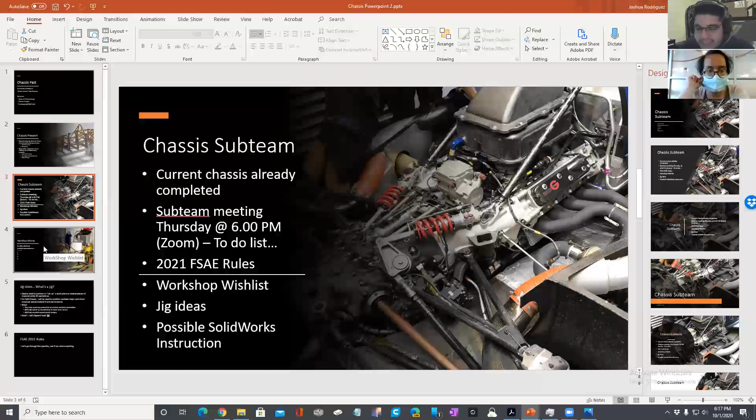Okay, so this was supposed to be the fun part. I was trying to make today fun.

Nobody else is in here, right? It's just me and you, I think. There's no one in the waiting room. I don't think there's a waiting room. Let me get out of this and make sure there's not a waiting room, because that'd be really awkward. But no, I specifically set this one up to not have a waiting room, because I noticed you messaged me last time, which I did see, but by the time I saw it, it had been like a day, so I wasn't going to message back. So going forward, I'm not going to have any waiting rooms, so everyone can just pop in. It's not really noticeable to me when there's someone waiting. So yeah, no one else is there, so I guess you'll be the first one.

What did you actually want to do in the shop? I think you specifically said welding, but is there anything else you want to get your hands on? Any type of experience you want with metalworking? I feel like I'm lacking the knowledge to know what I want, but as of now I just want the experience. I think it's just a little more research to see what I can actually get my hands on.

Okay, I'm writing this down so I remember, because I keep these PowerPoints.

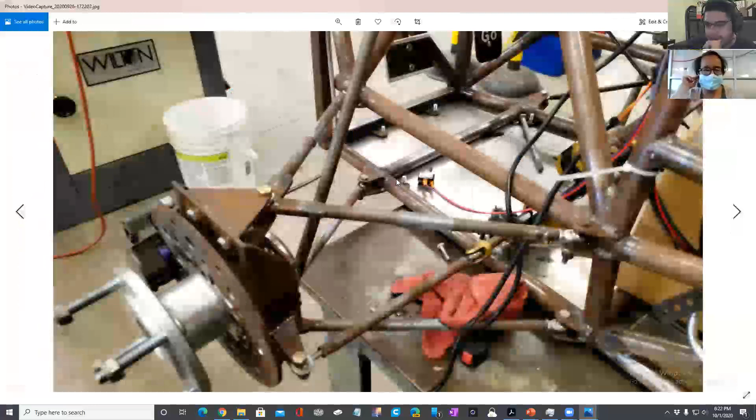Does that make sense? Yeah. Sorry, is that overwhelming a little bit? A little. Okay, so this piece right here, let me go back a little bit.

So we started with this piece coming off of the front roll hoop. This front part was just hanging in midair by itself, because it's not directly in line with this piece, and it's also not directly straight out from this. It's at an angle, and it's not directly parallel with the ground. It's actually upwards a bit. So in X, Y, and Z, it is actually off axis.

So I had to find that point in 3D space and then hold it there while somebody welded this. And then this is just hanging out like a twig from a tree. And then we would measure it again, because welding will actually impart a little bit of stress on this, and if there's nothing holding it in place, it will actually tend to lean one way or the other.

So we would weld it, and let's say we would weld on this side, it would actually pull it in a bit. But then we need to weld the other side too eventually, so we kind of do this. But you can't put too many welds in it, because then it becomes stuck in place, and you don't want that if you ended up pulling it off of where it needs to be.

So especially for pieces like this, I'd like to get something that we can use to more precisely locate it, because I did spend about 30 to 40 minutes on one side and then 10 to 20 minutes on the other, positioning it. They welded it a little bit, and we readjusted it with a hammer, a gentle hammer, but with a hammer.

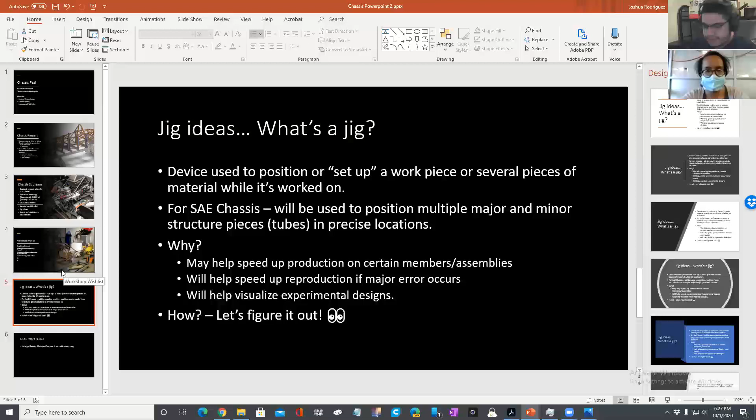Is that something you might have time to research in the next week or so? I think so. Okay, and it doesn't have to be official academic research where you have to cite your works or use official published papers by doctorals. It's like, no, we just Google and see what happens. Some of the best ideas come from strange websites on the internet you've never heard of before, like this guy building one in his garage. It's so cool.

Okay, so let's open up the rules. I think you had yours opened already, right? Yes. Okay, let me see. Where did mine go? There it is. Okay, I'm just curious.

What are you viewing the PDF on? What program? On Google Chrome. Oh okay, so you don't have a list of bookmarks on the side for it, right? No, there is bookmarks. Oh there is, it shows those. Yeah, there's general regulations, administrative regulations, and all that other stuff. I need to rework my Google and figure out why it doesn't show on mine.

Okay, so go to F, chassis and structural. I have no idea why it's F. No idea. And we went through this stuff already. Oh, I hate that scrolling mode. There we go. Do you want me to re-explain some of this stuff?

Yes, please. Okay, so the hoops kind of define the outer bounds of most of the vehicle, especially for the cockpit and the engine compartment. So the front roll hoop to the rear - you're kind of imagining there's a broomstick that goes right here, just because that's a long, flat piece that people will use to measure it. Primarily, you don't want the driver's head sticking above here because in the event of a rollover, this part may flatten out depending on your structure, and the only thing protecting the driver is the orientation of this hoop and the ground. So if his head sticks out above here, he's going to have a bad time in a rollover.

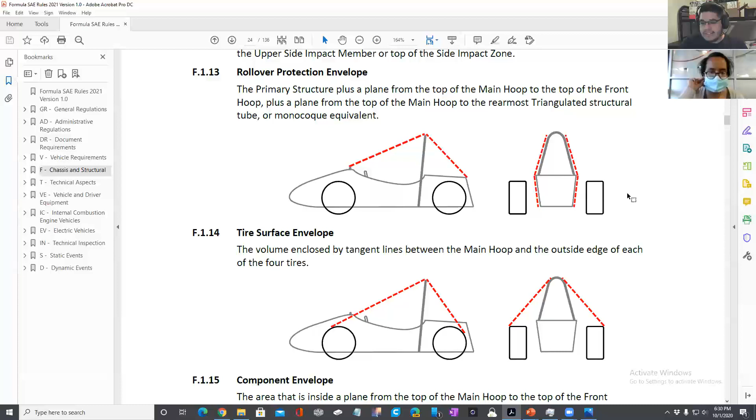And you have pretty much the same for this too - the roll hoop is shaped this way, don't go outside of this boundary. Same for this, although this isn't usually a problem for people because they tend to have body work and/or some kind of flooring for their vehicle, so you don't magically stick your foot outside of the car anyway. Does that make sense? Mm-hmm.

Okay, so that's for the chassis components. There's also one with the tires, which doesn't give us a lot of detail on that - it just says this is a volume described by the tires. That might be more for aerodynamic components, but we'll have to take a look at this later. It's not giving me a lot of information right here. This is something else, it's more of another redefinition.

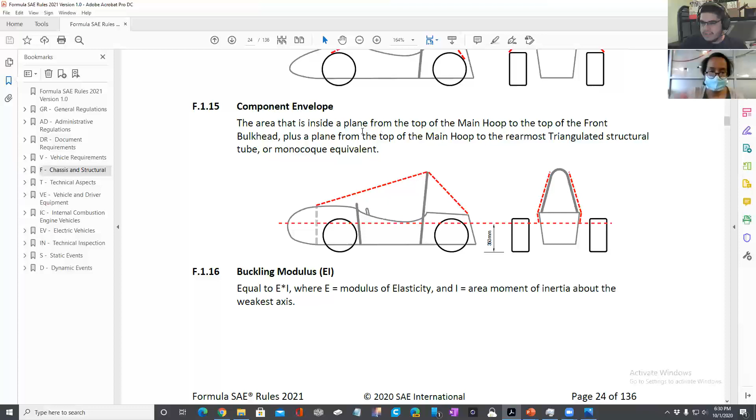Component envelope, interesting. You'll learn about this even more in your solids class. Basically, this is a calculation that has to do with the area, the cross-sectional area of a tubing, versus that area's average placement to the center of the axis. So it's a relationship between surface area and how close it is to the metal.

And then this is basically the stiffness of a metal, because everything in the universe, if you put force on it, it actually does elongate. Doesn't matter what the material is, it will elongate. This E, modulus of elasticity, determines how much it elongates, right?

A higher E means it's stiffer. I know it's called modulus of elasticity, but more elasticity doesn't actually mean it's more rubbery. It just means it's stiffer. So the naming gets kind of wacky. But even this pencil is technically elongating as I'm pulling on it. Even the diamond will, but obviously by a very minuscule amount because of its stiffness.

Whereas this, if I put force on it, it is bending because it has a much lower modulus of elasticity.

Most of this is taken care of by just choosing our go-to metal - it's not stainless steel, it's not aluminum. What do you call it? It's a variant of carbon steel. I forget the exact number, but our options are in here. There are other options as well, but that's what we stick to because it's cheap and easy to manufacture and work with.

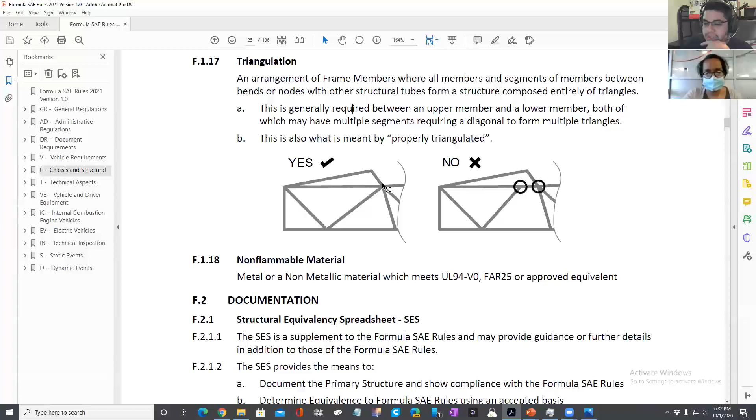Again, we're going to triangulate points if we ever build a chassis. So not this, more like this. This is called a node, where it all meets. And it just helps to distribute the force to other members, so you don't have too much force in one point with no way to counteract that, and then this tube will bend, which obviously is bad.

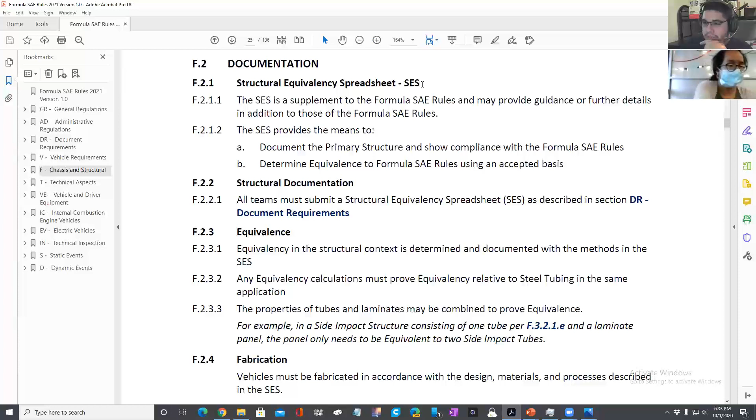This is kind of a beast. Kyle has this, I need to take a further look at it. But there's a few documents for chassis that we have to list out, like every beam that we have, and kind of the orientation and the weight. We'll go over that when we get to it because it's very boring.

Are you scrolling on yours or are you just watching me scroll? I'm scrolling too, but mostly just watching you. Okay, that's fine. I just realized I have it on screen - duh, like I didn't have to make you open it, but it's helpful that you know where it is too on your document.

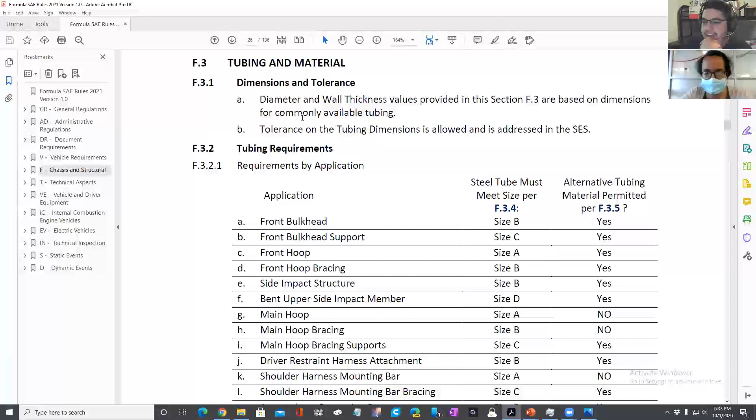Again, different designated structures have different tubing sizes. Most of them are ABC. This one's a weird size, but we don't have a bent upper side impact member, so we don't have to worry about that.

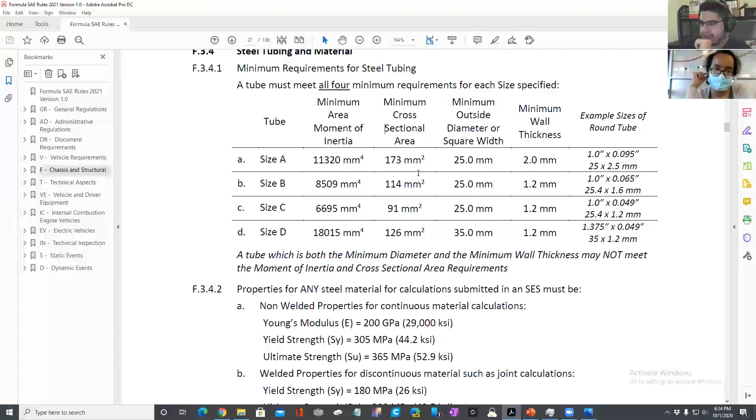So again, remember that I component we're talking about, E times I? This is the I right here, or heavily related to the I. Yeah, it's just different units and classifications. But they let you cheat - look, they just give it to you right here, like 'oh hey, you just use 1-inch tubing at this approximate size and you'll satisfy this requirement.' So it's nice that we have already pre-existing industrial sizes for the tubing that we need. Makes it a whole lot easier to construct.

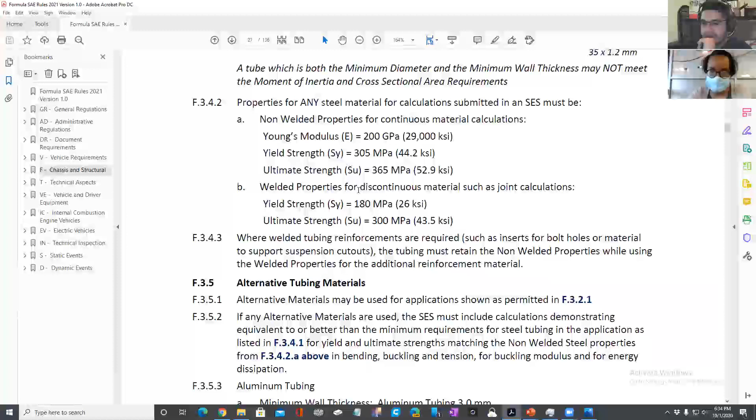Now there's standards for the metal. It needs to conform to the stiffness. And these are other things that have to do with that, but you're primarily looking at this right here - welded properties for discontinuous materials such as joint calculations. I don't think we have any discontinuous joints, although I'll need to look up the definition of that.

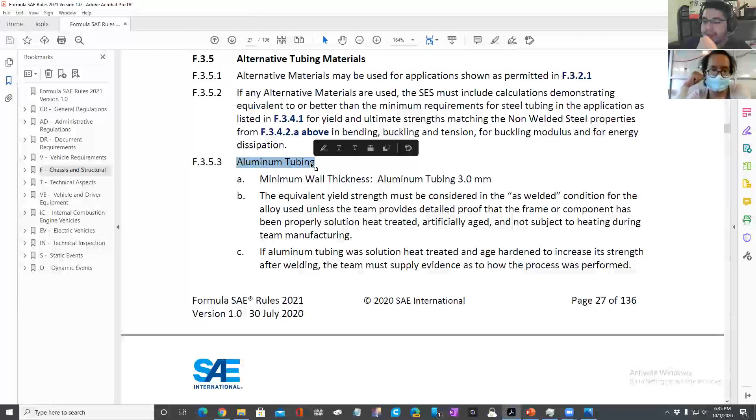Alternative materials - yeah, so again, aluminum is lighter. You do tend to need more volume of it, but you can have a stiffer aluminum structure with less overall mass. It is more difficult to weld though, so people typically don't do it. It's also more expensive.

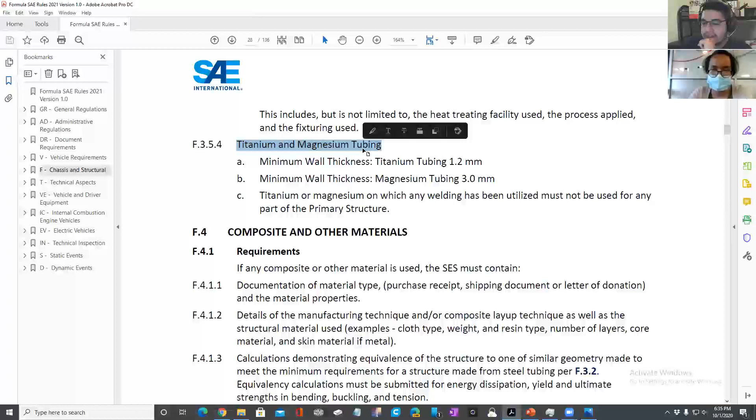Kind of the same thing with magnesium and titanium, but to a bigger extent, way more expensive. Obviously a better material in terms of stiffness and weight, but working with it and buying it is very difficult.

Steven wanted me to look into carbon fiber monocoques, but I want to get the chassis jig done before I look into building any kind of carbon fiber chassis at all, because it's not the same procedure. It's not like you're taking a bunch of tubes still - it's like you're building an actual 3D, a singular 3D object, like a beautifully sculpted piece of Play-Doh. It's one continuous piece, right? And then it has attachments for other points. So not like a steel tube chassis at all.

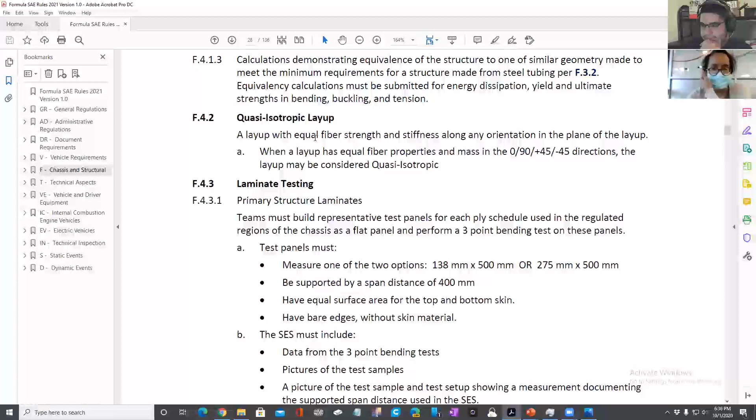If you see anything here that you're curious about, just let me know. If it seems really weird to you, it's probably weird to me as well.

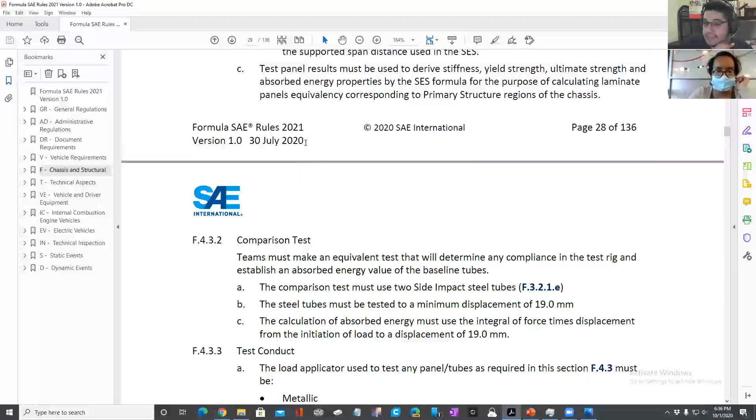Yeah, I just haven't taken the time to look at the rule book, but I'll do it this weekend. And then I think the officers might be going to the shop again Saturday. I'm not sure if we're going to make it a weekly thing, but it seems like we've been going on Saturdays. So if there's anything you wanted me to take a picture of, find out, or just show you, let me know.

Did I ever show any of you guys pictures of how big the space is? No, I don't think I did. Okay, I'll have to look that up on my phone because I do have pictures of it. It'd be nice if I had a floor plan too.

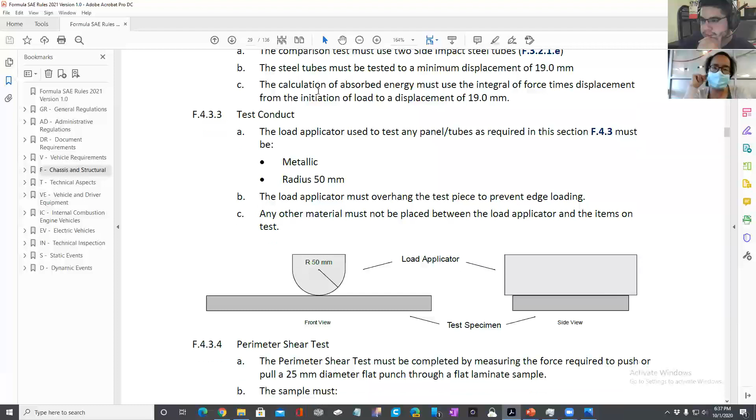So what building were you guys in before? We're in the same building still. We were in the PDSL, or Powertrain Dynamics and Systems Lab. Basically it's a building with two big rooms, front and back, separated by two doors. We had half of one side of the building, so a quarter of the overall space. Actually a little less than that because there was a hallway running down the middle, with a bunch of cabinets separating our space. So it was slightly less than half that space, probably about 37% of one side.

But now they moved, and it used to be a senior design building. Seniors would go in there to work on their materials on a mill or a lathe, shape whatever metal they needed, welding, stuff like that, for their senior design projects. But because they built the new engineering building, they moved a lot of those goodies over and left us the building. Although one side of the other room is going to, I think they said, Steve Griffin, who is a huge donor or contributor to the school, and he's basically using that to make his little office and an engine dyno, which I think is pretty cool.

So instead of us having like a third of one side, we're getting all of that side and then about 70% of the bigger side that looks like it was bigger. So we basically have like 80% of the building instead of like 20%. And then all the other stuff, or most of it, went to the new engineering building.

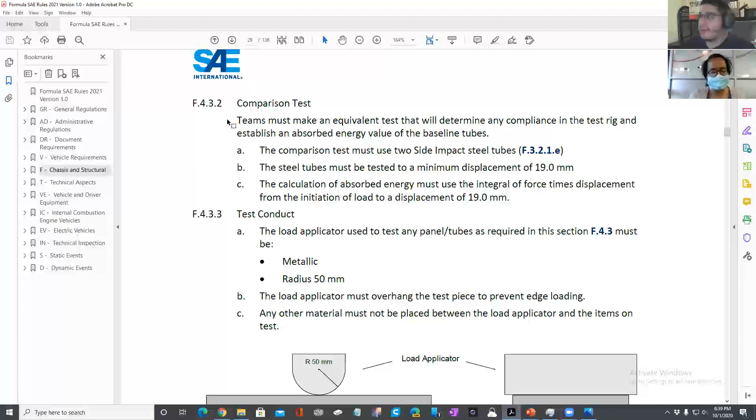Have you been to the new engineering building? I just walked around, there's a lot more study spaces and stuff and whiteboards, it's really nice in there. Yeah, there was this one big room, I didn't get to stay in it long because we were trying to get somewhere. I think it's just a bunch of big tables with whiteboards, right? Yeah, I need to spend some time in there and just try it out and see how it goes. But the machine room is attached to that room, just through a door or a small hallway, and I think you can walk in there kind of whenever you want. I'm not 100% sure, just kind of peek.

But that's where the manufacturing labs are going to be. I don't know if they started those yet because of Corona, but yeah.

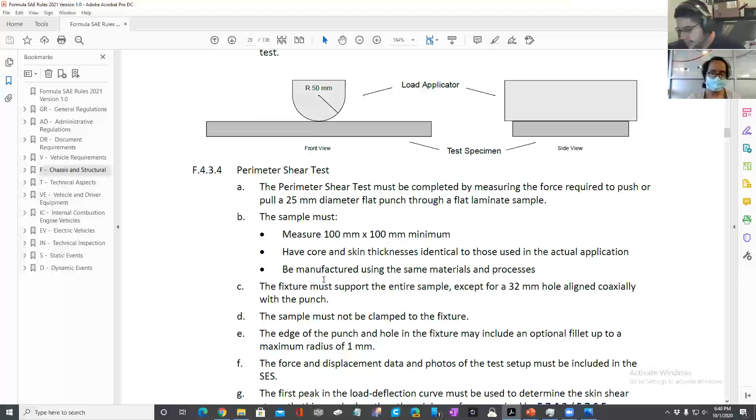I don't know if they're actually going to do this for us. I've never heard of them actually doing this, as long as they can verify what material we have. This might be primarily for alternative materials. But if they're like, oh yeah, you used carbon steel, okay yeah you're fine, it passes. I need to ask Kyle about that because I don't think I've ever heard of them doing that test.

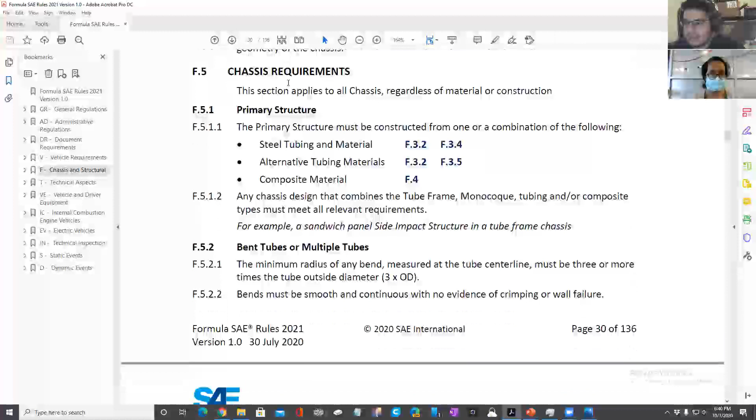Lap joint, that's for laminate samples, so that's for carbon fiber reinforced polymers. We went over that already. Primary structure.

Bent tubes, so this is kind of an important thing, probably only for really new teams. But you're only allowed to bend a tube so tight, and the radius of that bend is relative to the outer diameter of the tube. Since all of ours is 1-inch tubing, we cannot have a bend that is tighter or has a tighter radius than 3 inches, which we normally don't. The top of ours is kind of squarish or flat, so we don't have that problem.

Let me see if I can get a picture of that. I do have pictures of the chassis that I need to upload for everybody. I said I'll probably just put it on YouTube sometime.

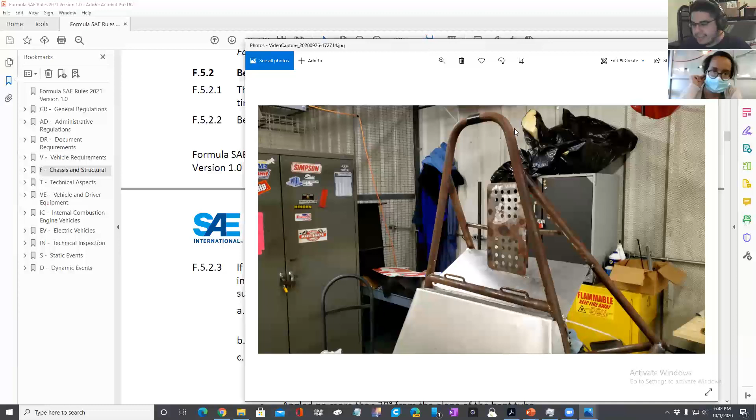I mean, don't bend a big tube around a really tight bend. It's the same for electrical wiring. They have similar rules, although I think theirs is 6 times the diameter of the wire, but that's electrical.

So this is not us. We only use bent tubes for the actual roll hoops. This is saying other than the roll hoops, so we can just ignore all that. Holes in the tubing, we don't do that, so we skip that.

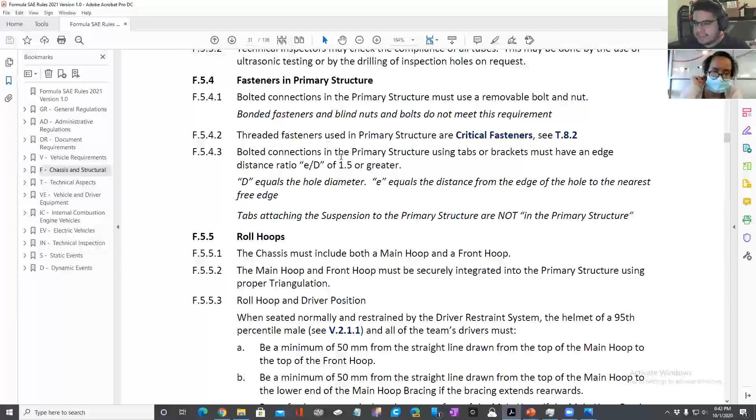Fasteners in primary structure. So that basically means if you have major members that are held together by nuts and bolts instead of welding, that's where this comes into play. Yes, with primary structure. So this doesn't include things like the flooring or the seats that ergonomics has to worry about.

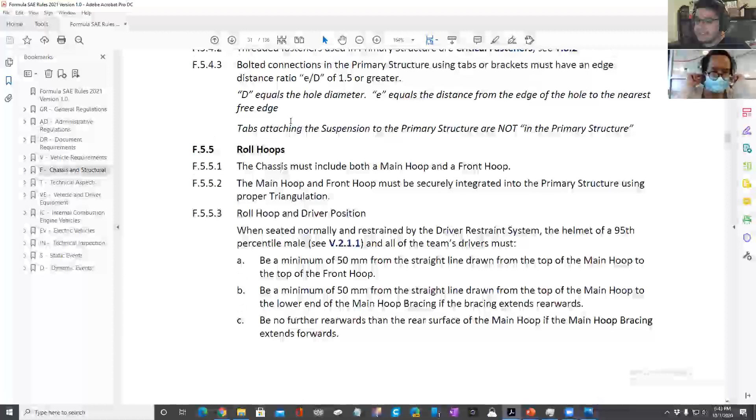There's a lot that goes into this. Yeah, a lot of it's really just safety for the most part. Safety, comfort, and ease of use. Which, I mean, that's what a chassis is, because everybody would like to have as paper thin chassis as possible to save weight, but of course it has to be able to take the forces of a driver's weight, braking, suspension, power, and then an impact if need be.

So if safety didn't exist, cars could go a lot faster, but then you would die. So that's bad. Oh, so here we go. The helmet of a 95th percentile male, for obvious reasons, because males are bigger than females. So we need to have a tall dude in there because we're not worried about short people falling out of the car. That makes sense?

Okay, so it needs to be a minimum of 50 millimeters from the straight line drawn from the top of the main hoop to the top of the front hoop. Do you remember that broomstick thing I was telling you about? Yeah, that's exactly what this is. And it's not vertical distance per se - the broomstick is going to be at an angle, so you need to measure that 50 millimeters at a tangent angle. Does that make sense?

So that is fun. I tend to just call that like 2 inches, which actually gives you an extra millimeter-ish, so I overestimate on them. It's like, oh, it's 2 inches, because we build everything in inches. We're SAE - I'm not saying they prefer inches, but we used 1 inch tubing, so it's easy to just make everything else in an inch format. So I just convert this to 2 inches. Gives us a small little extra margin of safety.

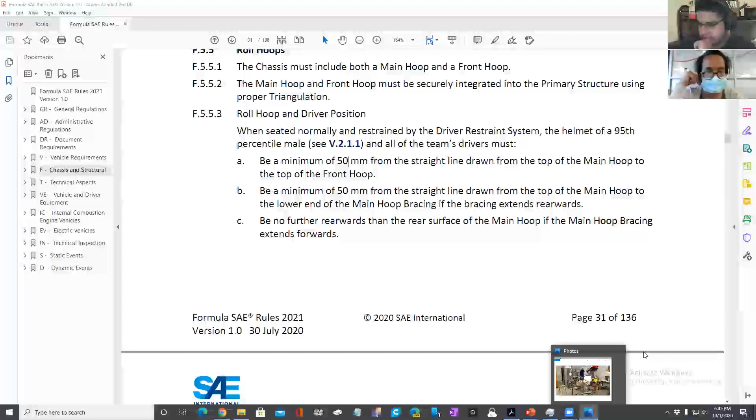Oh, and then if we have bracing on the rear, so let me put my picture thing up. I don't know if this is looking dumb on the stream. So...

This thing - so the driver, there's going to be a cushion on this technically. I think the cushion's about 2 inches thick, or an inch and a half, I'm not sure. But the actual position of the driver's helmet has to be 2 inches away tangentially from these lines as well, I believe is what it's saying.

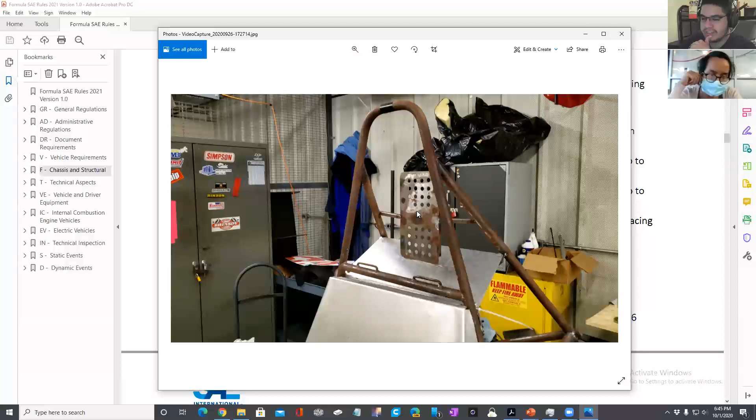Yeah, if the bracing extends rearwards - and then ours doesn't go forward, so we're fine there. So yeah, there's that consideration to be taken too, which we've checked this all a long time ago. Obviously, the cushion is going to help push the driver's head forward away from this, so that helps a lot.

Oh, here we go, ta-da. Okay, so does that make... you already got it, I'm sure, but that helps to visualize it a little bit better, right? Yeah.

Oh goody, I actually forgot that. So it's not this bar particularly, it's from here to the bottom of this. So this bar actually comes in more than the helmet does, obviously, but it's this line. So that actually gives us even more distance, especially with the headrest.

Okay, I think they made somebody called Percy. I tried to rename him Bobby. It didn't work, they didn't like it.

But I made one of these in CAD, an actual assembly, so you could take his head and rotate it, his shoulders, and whatever. It was a little difficult for me because I can't just... you can make assemblies that go inside each other and occupy the same three-dimensional space, but it looks stupid and isn't realistic. So I made them actually three-dimensional, kind of 2.5 dimensional, and gave him his backbone.

I made these circles, 2 inches wide, maybe 4 inches, but probably two. Each shoulder joint area was an extra 2 inches on that. So his cranial part, his shoulders, and his hips actually stuck out 2 inches past that, so they were at least 6 inches wide.

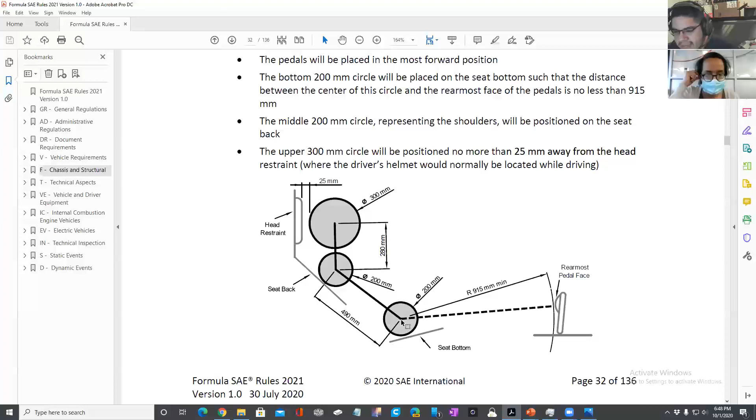There's a real version of this in the shop that I think needs to either be remade or re-verified, because one of these dimensions changed from the time they made him. I think he's probably about 4 or 5 years old, and one of these changed just by 10 or 20, but I think it changed.

The front roll hoop must be made of blah blah blah with proper triangulation, of course. It must go from the floor to the steering wheel, basically.

So the steering wheel, straight horizontally, cannot come above the front roll hoop, which is interesting because for the most part the steering wheel isn't angled straight like this - it's usually angled up a bit and then slanted, because the steering column is pointing downwards into the car, so the steering wheel tends to be at an angle. That has to be below this laterally. There's no broomstick test for that, but they're just going to eyeball it and make sure it's not higher.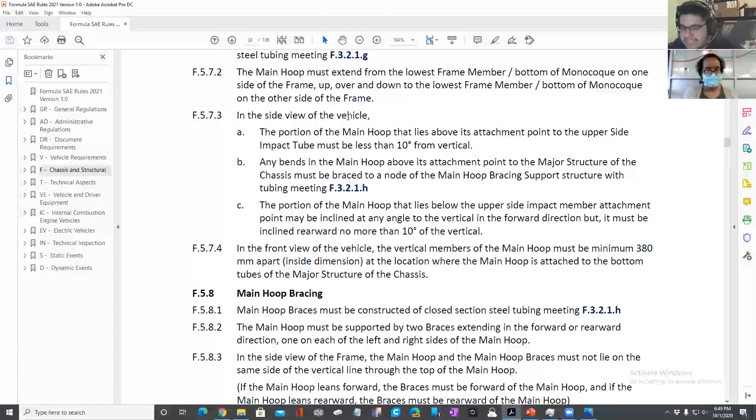The main hoop must extend from the lowest point up and over. So basically it needs to be tall - it needs to go from the floor up to wherever.

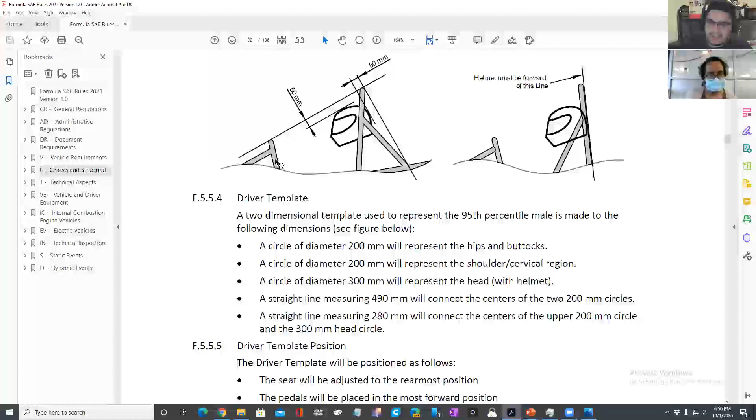So this is where I want us to pay attention even more. Okay, 10 degrees from vertical - what that's saying, I think, is this part can't be more than 10 degrees forwards or backwards, which I believe ours is just straight up and down, so we have no problems there.

Where was I? Oh, any bends above its attachment point to the major structure - we have no bends above it, it's just flat. What that's saying is this right here. So if we had any bends here, we'd have to triangulate even more, but we don't, so we're good. This bend obviously is a pretty long bend - you can see it goes from here to here, but it's triangulated technically right in the middle, so we're good on that construction.

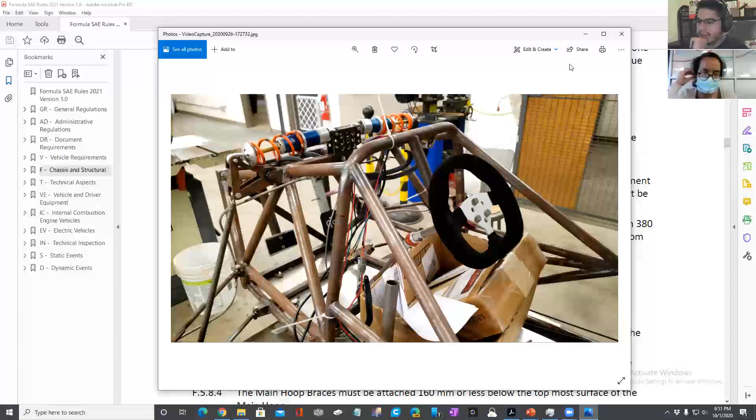This is interesting - the main hoop that lies below the side impact member can lean forward at any angle, but it can't lean backwards more than 10 degrees, which again, ours is straight up and down, so we're fine there.

Okay, 380 millimeters, just remember that. It's saying the main hoop needs to be so wide. This part right here, I think. Right? Yeah.

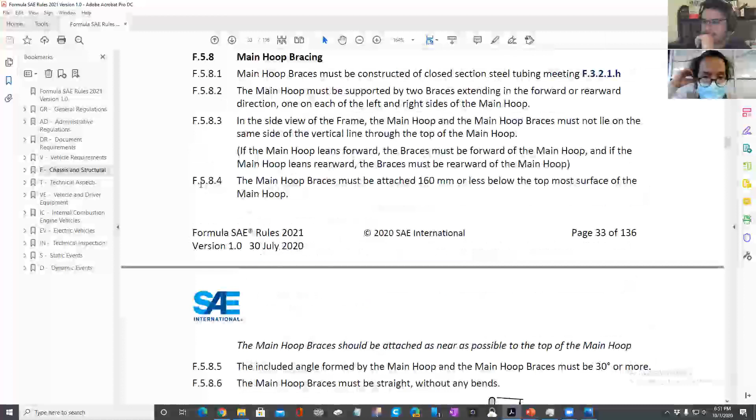Sorry if this is a little boring, but these are the specifics we need to look over. Oh, 160 millimeters, so basically this brace can't brace it down here. It's not bracing a lot if it's on the bottom of the bar, it needs to be towards the top. Like if you're trying to keep something tall and heavy from falling over, a fridge, you're not going to grab it from the bottom, you're going to push on it from the top, right?

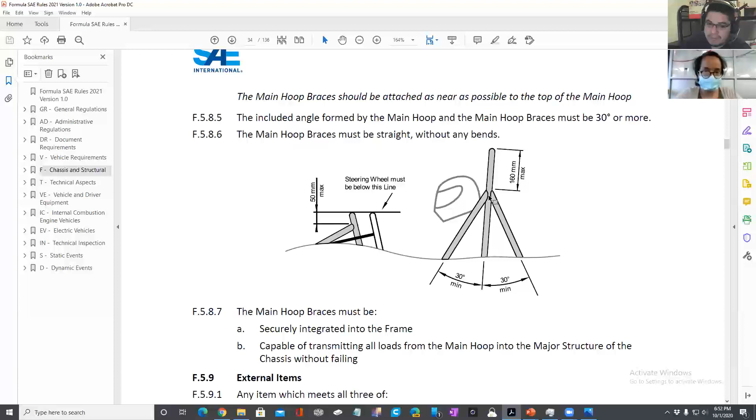Another steering wheel thing. Oh, that's interesting, so you can have it up to 50 millimeters away from this node, but still no higher than this. I think most people just aim to make it in line or slightly below the top of the hoop because it gives you more leg room down here, so they just aim to put it as high as they can. Securely integrated, transferring loads, of course, of course.

External items, what are external items? I think that's just talking about radiators and stuff, but I'm not sure exactly. I'll have to bring that up with the powertrain team.

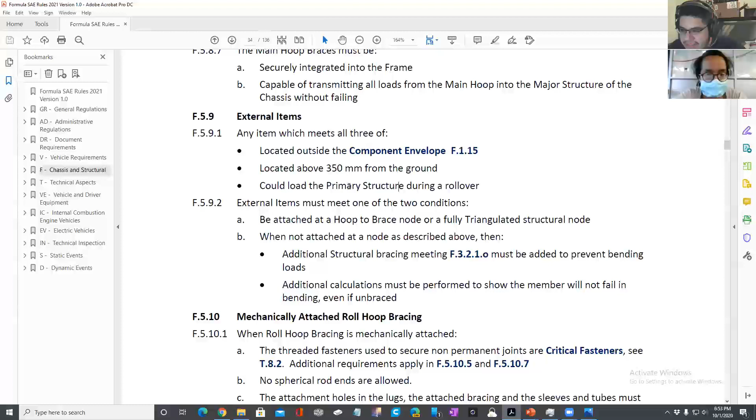Oh, it could load the primary structure. Well, I don't think a radiator is going to put much stress on the primary structure, right? A radiator is like 3 to 5 pounds.

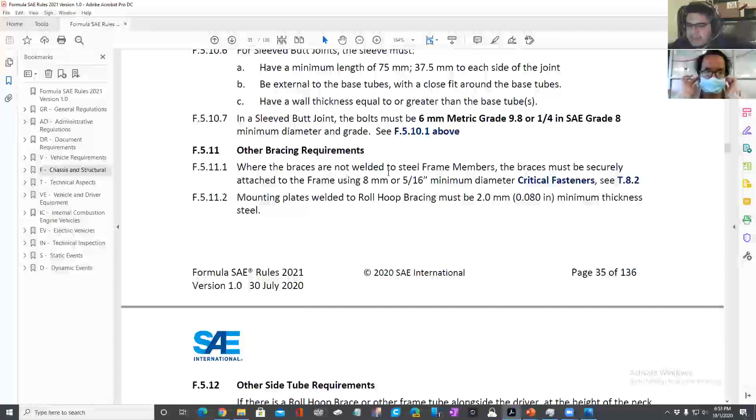We don't have any of these. We don't have any of those. All of our stuff is welded. I don't think we have any bracing. Well, other types of bracing, so we're good there.

Is there anything else that's catching your eye here, or is it just all kind of alien? Yeah. It's okay, once you get more hands-on with it, hopefully we can lead you guys through some of the design. I'm sorry I didn't get the SolidWorks licenses yet, that's kind of my fault, but I didn't plan to do much of that today. I emailed the IT department and they said just to go to the computer lab of the business building and they can get me set up. Oh, okay, that's good, yeah.

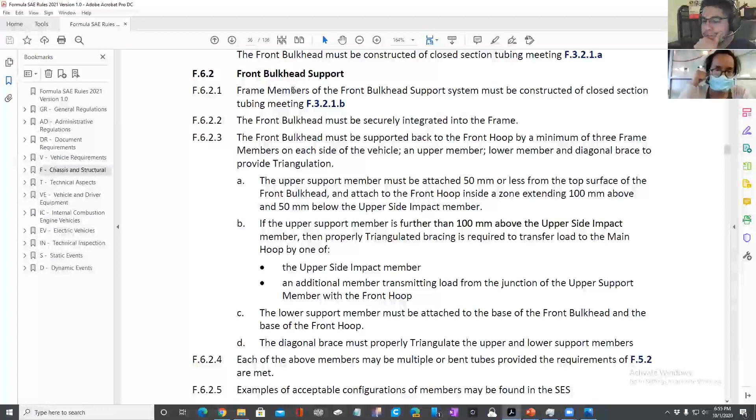So I'm probably going to go tomorrow after lunch. Okay, yeah, just let me know, I'll see how it goes. Okay, because I still need to review with Kyle on the proper way to construct it, because he was really good with the three-dimensional construction and empty space. It's easy when you're building off of something, but when you're just putting it in the middle of nowhere, he was pretty good with that.

We're good there. Oh, I forgot my dog was in here. Oops.

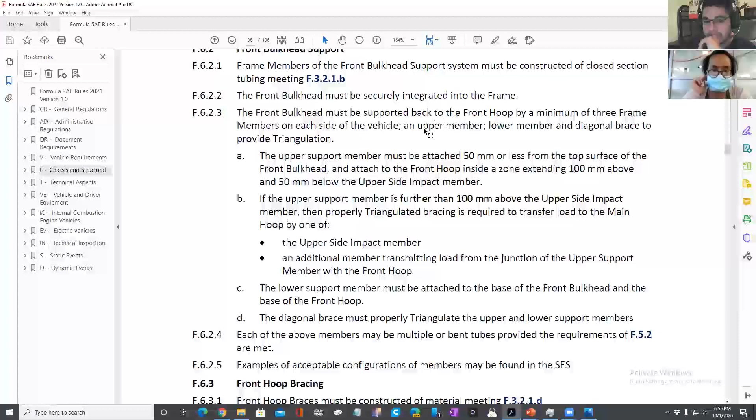Do you still, or sorry, when you get SolidWorks working, you can use that file I sent in the group chat, it's actually the chassis that we're using. Okay, and I don't think it's had any major redesigns or anything, it just had some stuff added in real life, like the headrest and then some seat support at the bottom, maybe. But you can get a really good look at that.

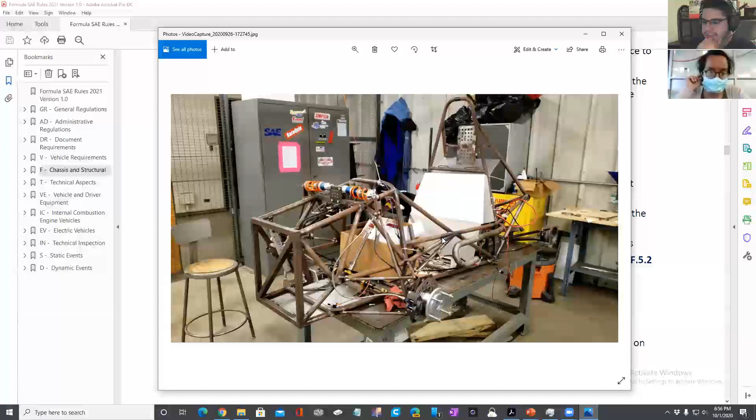If an upper support member is further than 100 millimeters above the upper side impact member. Oh, I don't think we have that, because this is the upper side impact member, so I think it was saying if there's another one going, but we don't have that. Oh, then it has to be triangulated, I'll just triangulate it. Yep, ours are supported by bracing, forwards and backwards.

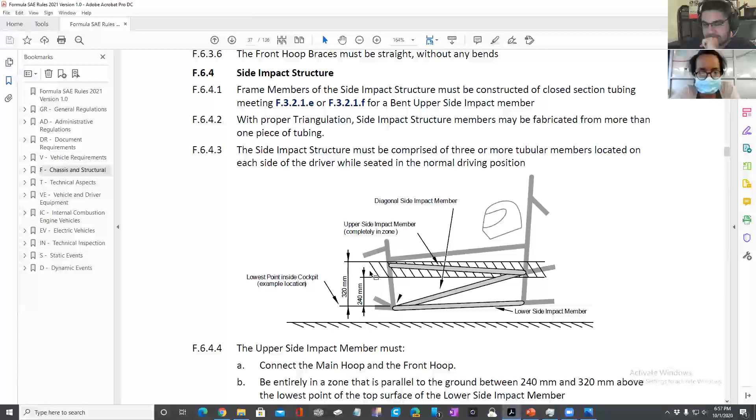Ooh, sorry, I'm sure you've heard the story about this, right? I don't think so. Okay, let's see if I can make my screen go. How do I make this perfectly smaller? Okay, is that picture still big enough for you? Can you zoom in a little? Yeah, okay, we're talking about this area.

So this thing right here, it can be at an angle, but we just made ours flat, I'm pretty sure. Most people tend to make where this part meets the front roll hoop triangulate their suspension with that. Ours did not because of the design. That's okay because that's still triangulated, this is still about within 2 inches, it's fine.

So this is where we could have broken rules, but we have a judge on our side that's like, oh yeah, that's fine, you know, it's good. I think the main point was not to be a stickler about 2 inches, but more about proper triangulation and reinforcement. Is that the thing Kyle mentioned last time? Yes. So this thing was not supposed to be more than 2 inches away from a node, he said it's just barely outside 2 inches, okay, but I don't think there's any force that can. Oh, my dog left.

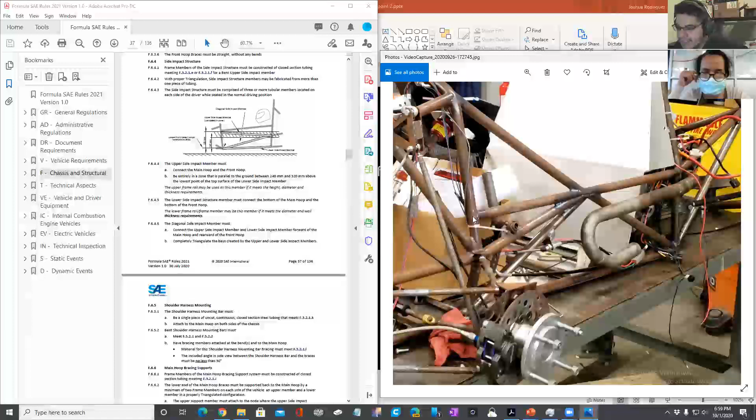There's no force that's going to jam the bar into this and cause it to buckle, so we're good. Let's say this car got hit in the back, and you put all of the force into this part. You'd think all of that force would come through to here, right? Well, according to statics, no. It's also going to get pushed through into a node, through here, into another node, and it's also going to put tension on this bar here. So there's not going to be enough energy from a rear impact to deform it right here, and I think that's what they were getting at.

Okay. It'll be fun to just get back in there and take measurements of all this stuff again anyway.

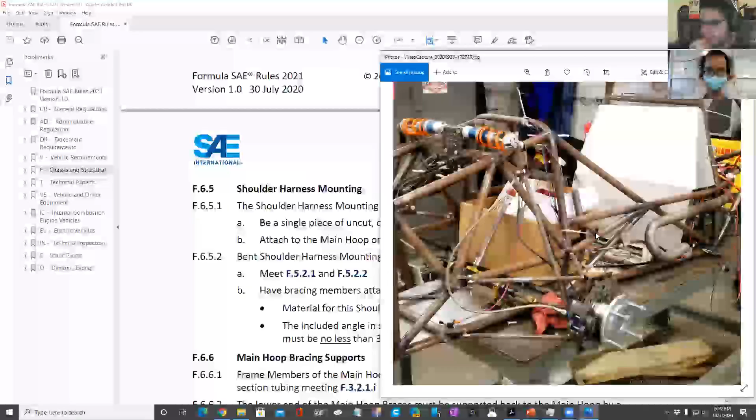Yes, there has to be some triangulation in there, is what this is saying, which we have plenty of right there.

Shoulder harness mounting, we usually leave this to ergonomics because they deal with the actual driver seat and seatbelt stuff. But we should be all good here.

So no less than 30 degrees. There's going to be a picture of this in a second, I'm sure. Main hoop bracing - yes, we have bracing.

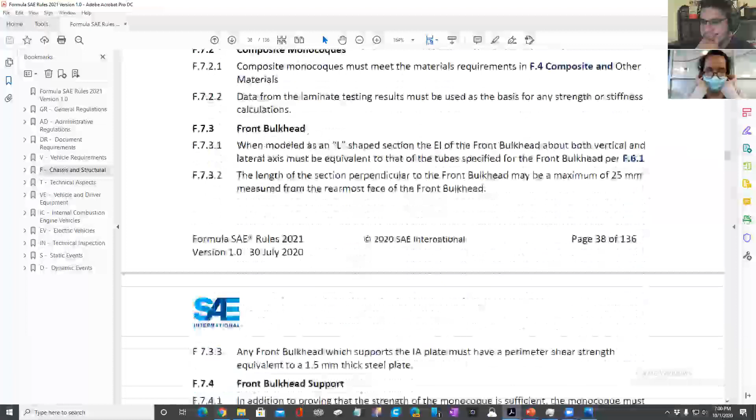This is the carbon fiber monocoque stuff, which we might look into after we build a jig, but probably not for at least 8 months. So if you wanted to build a carbon fiber chassis, I'm sorry - no.

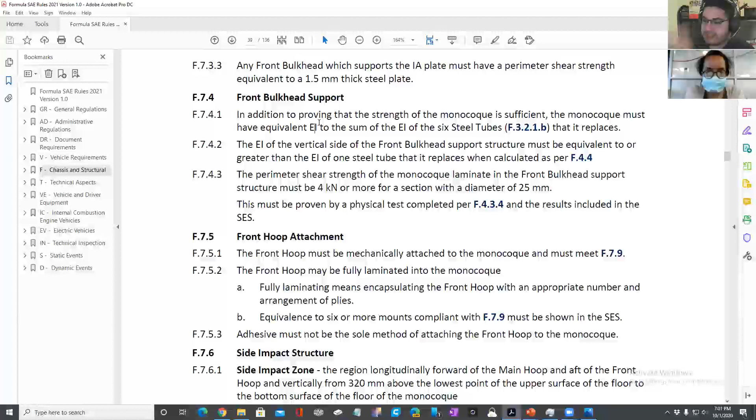Front bulkhead support must have an equivalent EI. We basically used approved square tubing. For the front, I think Kyle kept square tubing because it's easier to just build an impact attenuator, which is basically a foam cone that sticks onto the front of the car. It's easier if that tubing is flat - easier to work on.

We'll have to measure this sometime.

I'm thinking, are they saying it needs to be at least 320? Oh, that's just what they designate as a side impact zone. Okay, rough rule of thumb, very rough - every 100 millimeters you can think of as 4 inches.

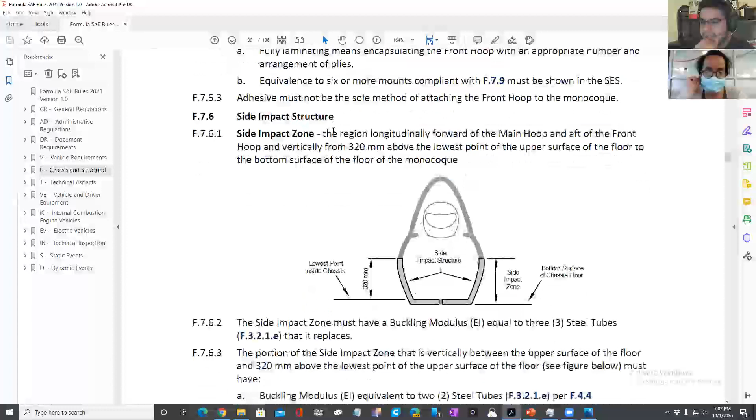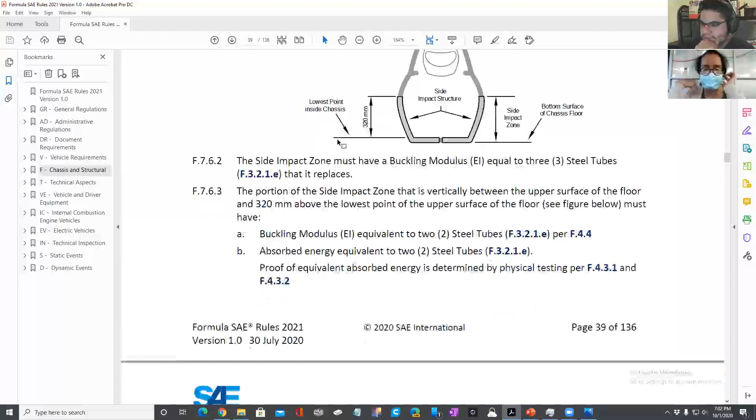So we're doing about everything in English units, not SI. They do the primary planning in English units, but some - I want to say suspension - does it in SI. The SAE rules allow for either; that's why they give it both ways. It seems like they prefer millimeters because it's a more precise unit, but we've always done inches, although I think people work in both. I was just wondering. Yeah, I think we use inches because most people are more familiar with it as far as visualizing. In designing you can do either, but we tend to use inches because it's easier for everyone - oh yeah, it's this big, versus oh hey, that's 470 millimeters. Yeah, that makes sense.

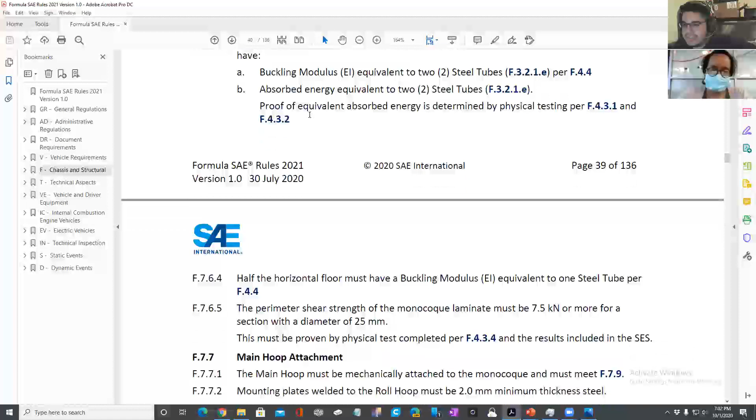If I was doing this by myself, I would probably just use SI units, but I'd conceptualize with English units, then convert to SI, round to the nearest 5 or 10, and go off of that.

Oh wait, it said all of F7 was monocoque, right? Why am I looking at that? Yeah, we can skip that. Yay.

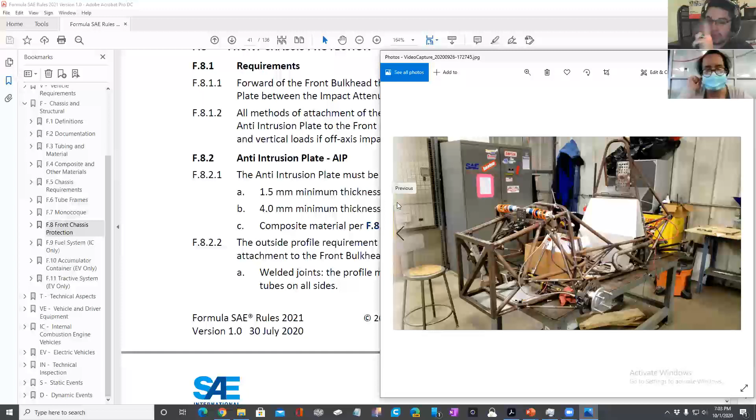Front chassis protection - the anti-intrusion plate, basically there's going to be a big front plate in front of this. If this square is bigger than a certain area, it needs cross reinforcement, that's why that's there. We'll probably make this a bit smaller next year so we can get rid of this, but there's still going to be a front plate covering this, and that's what the impact attenuator is attached to. When I say impact attenuator, I mean cone foam - does that make sense? It's basically like the bumper of the car. If you hit something, it's like, squish the foam first, don't hurt me.

1.5 millimeter thickness solid steel. Also, I think the primary reason we work in inches, at least for the chassis, is because we live in America, in Texas, and most people here are used to English units when ordering or working with metalworking companies. So it's just easier that way.

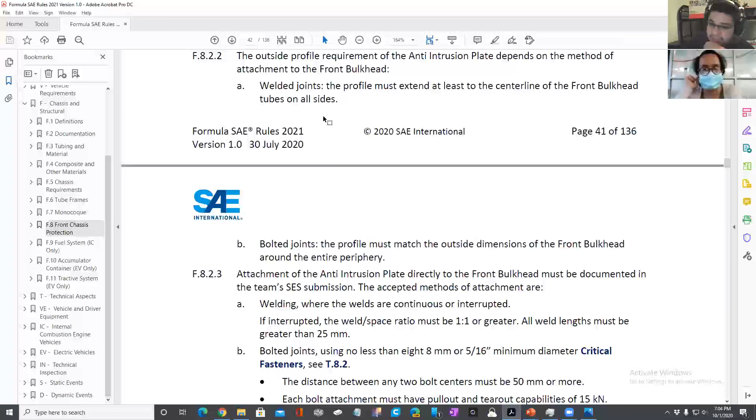I mean, they can do it, but a lot of San Antonio metal shops have - how do I say this nicely - they have older people working there who aren't as kind to metric as the rest of us. That makes sense, they might be stuck in their ways. Yeah.

Okay, we'll have to pay attention to when we get there. I need to ask Kyle about this. I think he said the plate is welded to the front of the car, but not entirely welded. I think he said we can leave some space where it's not welded, but the path where it is welded needs to be greater than the path where it's unwelded. Does that make sense?

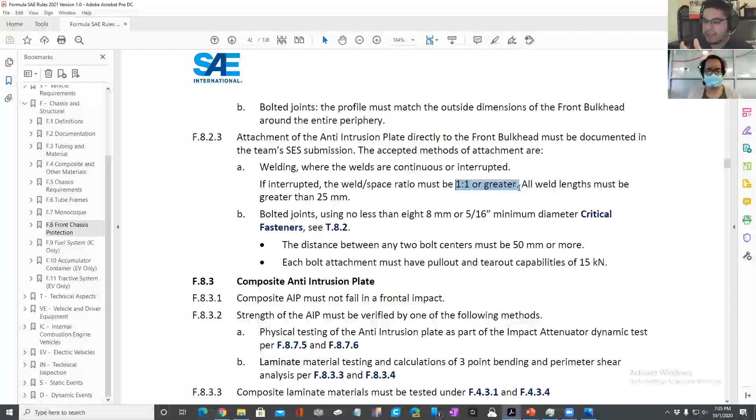Yes, okay. So, or we could also bolt it. I need to ask him exactly what attachment method we're going to use for that.

Must not fail in a frontal impact. Basically, the plate of steel that's protecting your feet from being crushed by whatever you crash into must not fail. Kind of self-explanatory, right?

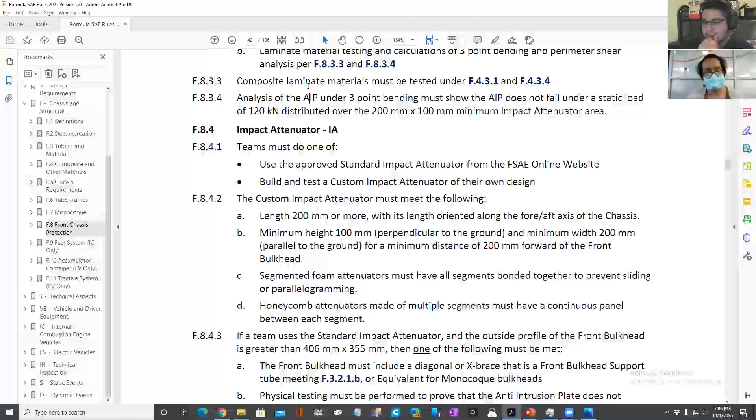Sorry, this is how chassis always starts, is looking over the rules. And then the fun starts, but we don't want to have fun in the wrong direction. It's got to meet certain dimensions, which I think we already have one picked up. Or if not, we can order one. I think Formula SAE directly sells them to students or has a direct vendor so you can say it meets all the requirements. Does that make sense?

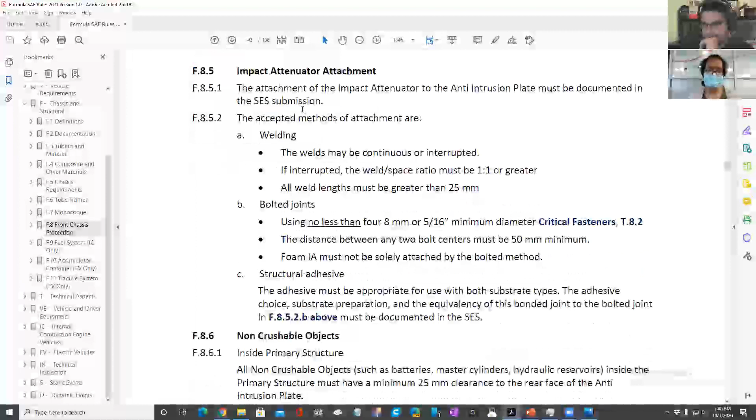Attachment, continuous or interrupted. If interrupted, more welding than not welding. All weld lengths must be greater than 1 inch. That's basically what that's saying, 1 inch.

Or we can bolt it too. I'll ask Kyle and then I'll ask Jonah, because the brakes are in the front also, how we want to attach it.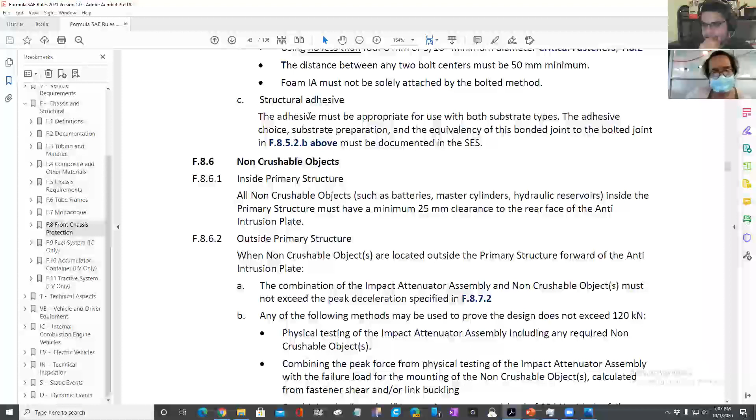Ooh, structural adhesive. So basically, the cone foam is going to be glued onto that plate. It's going to be glued. You can also attach it by drilling holes through it and trying to attach it with nuts and bolts, the cone foam, but it tends to fall apart and it doesn't hold up over time. You want to try not to touch it more than once.

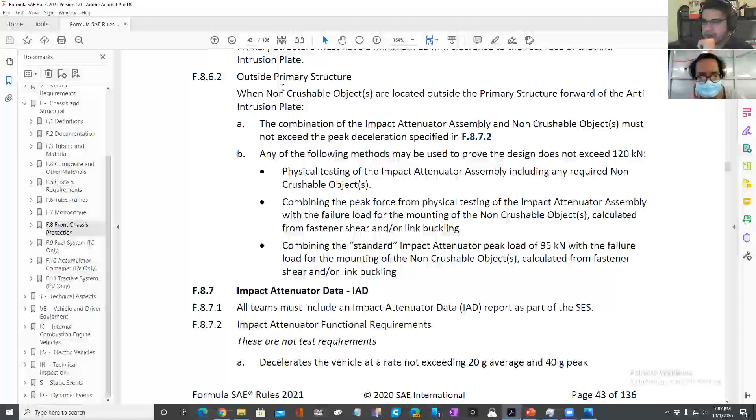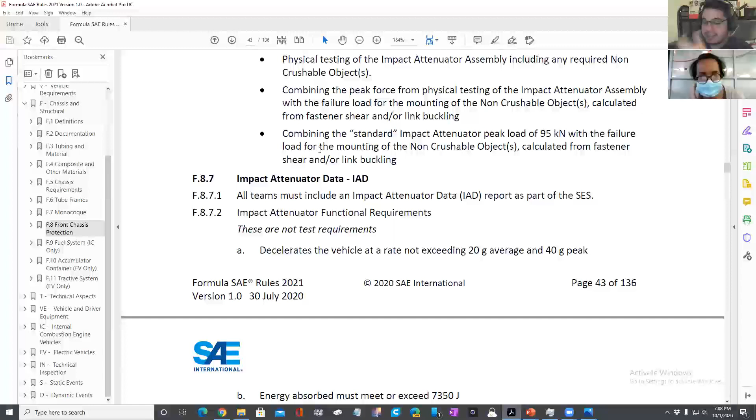When non-crushable objects are okay, basically make sure your car squishes, I guess. I'm pretty sure the carbon fiber bodywork is not going to hold up to a front impact. I don't think it's that strong, when it's unreinforced, because it's just a shape. There's no actual structure behind it. It's not like a car bumper where you have an actual steel beam or frame behind it. It's just there, and it has foam on the inside, so it's not going to survive a crash into a wall or anything. So we don't need to worry about it because it will be crushable.

I feel bad because Duncan's like, 'Oh, record this and send it to me,' and I'm like, 'Oh okay yeah, I'll send you all the exciting parts.'

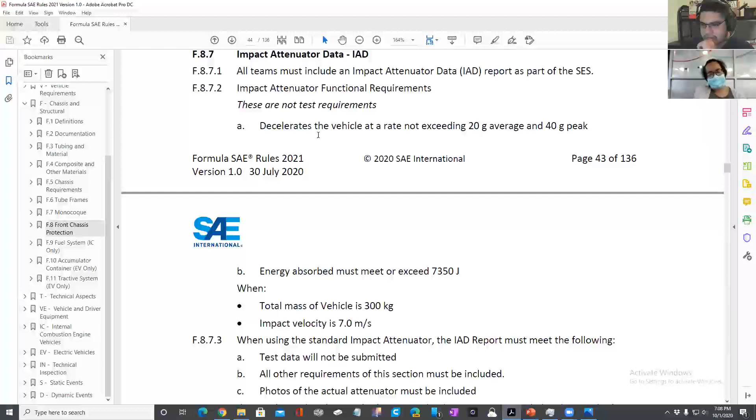So these requirements, I'm pretty sure, will be met if we just buy the cone foam from the proper vendor. Well, this is met by us for the most part.

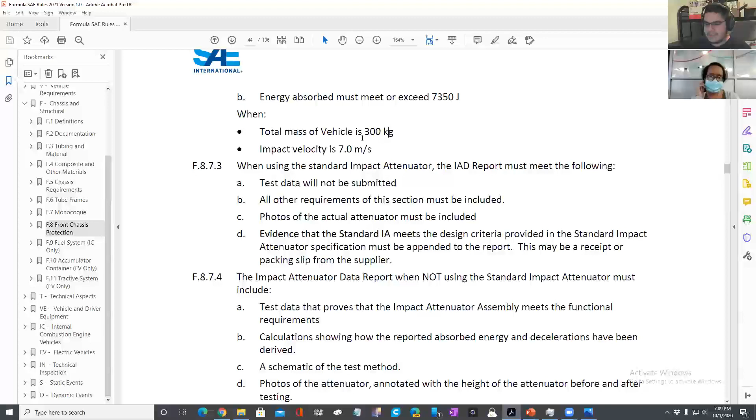Obviously, you don't want a car that's heavier than, how much is that in pounds? I don't know the conversions. I think it's about 2.2 and then some change. I use 2.2, so I double it and then add a tenth. That's my weird math brain. So it's above 660, don't exceed 660 pounds basically, which is pretty heavy. I think most vehicles tend to weigh between 400 and 500 pounds, 405. I think, not 100% sure, but I think.

Have you ever seen another campus's SAE car? No. I did see some images online, but I've never seen one in person. Oh okay, so when I joined last fall, about 3 or 4 weeks in, they had a thing where UT Arlington was hosting an SAE event. It wasn't official, kind of semi-official, not for a competition, just like, hey, bring your cars out and race them around, have fun and get some testing going and meet people. Kind of like a testing team fun day for SAE people. It was mostly for Texas, but we had some people from Oklahoma and Louisiana too. That was cool. Arlington basically has like $100,000 SAE cars, so some of their stuff is way up there. Because of their budget, they have approximately 20 of their older cars on display, and they do race them too during that time. Because you can't race older SAE cars in current years, you have to build a new one every year.

So stuff like this allows people to come out and race some of their older vehicles or get some of that SAE feel before the next competition. That was really cool. I went to that, and I took pictures of most of their vehicles and a lot of others.

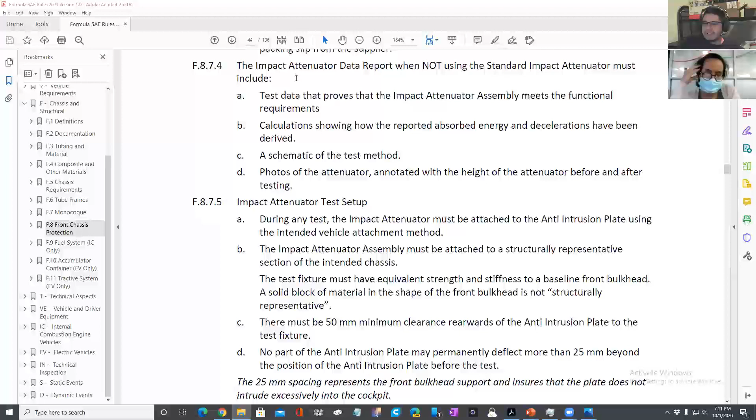When not using the standard impact attenuator, standard, so again, order it from the place that sells it to you, or that SAE says to buy it from.

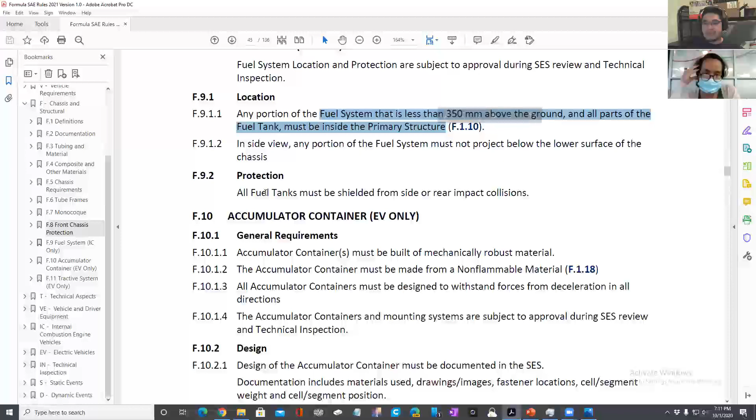Must be shielded from collisions, which, yeah, there's an engine in the way, so I think it's pretty well shielded. I'll have to bring this up with powertrain - I don't know if that means we need a plate or if an engine counts as being shielded.

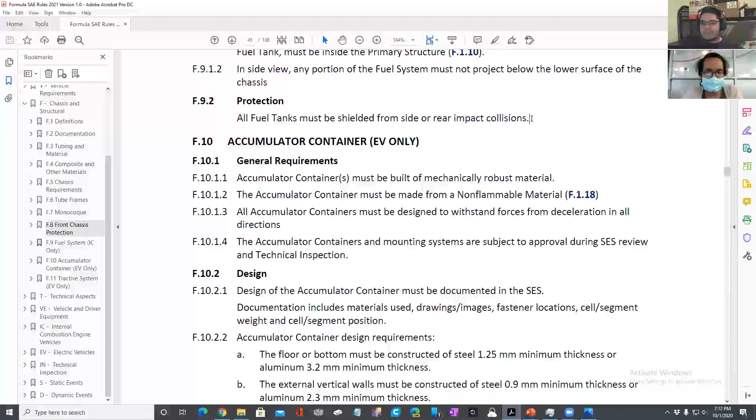Accumulator container, EV only. Sweet. The design of the - wait, is that part of - yeah, so F10, F11, EV only. And we're done, kind of.

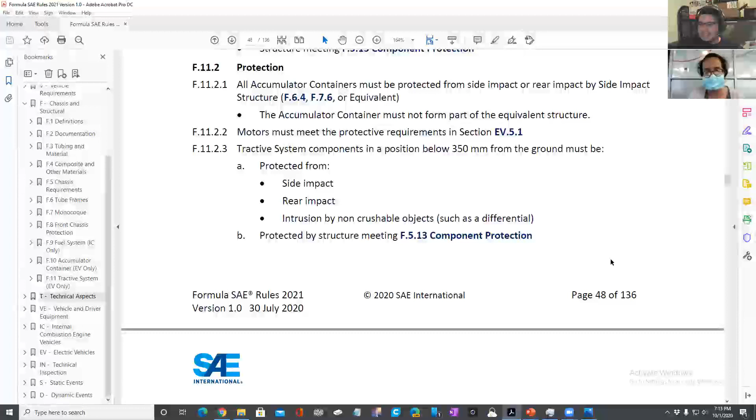I have a question - how long is the meeting gonna go to? Because I didn't realize it was already past 7. I need to get to the cafeteria since I live on campus. You can go now, or just give me like 2 minutes to finish up. Yeah, no, no, no - I was just gonna say I gotta go at 7:30 because the cafe closes at 8. That's fine, I wanted to keep these usually about 1 hour long anyways.

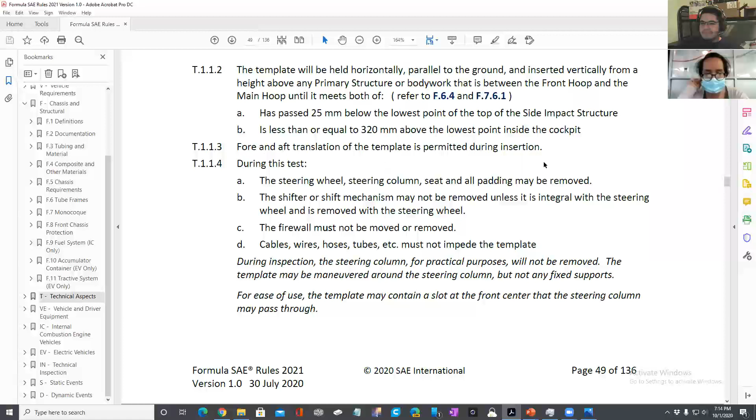Remember how I told you most of the rules were about safety? There are some that actually help you design the size or comfort of the vehicle. Most SAE vehicles tend to be about the same size because of these next 2 or 3 templates. This template needs to be able to fit in the car while it's completely lowered vertically into the car, all the way down and then all the way up. This is basically where the driver goes - here's his butt, here's his legs, here's his knees - and then this is the front roll hoop. So this is like the minimum size of the car, and we usually don't go much bigger than this because it increases the weight by a lot. Because of this rule, most SAE cars are around the same size generally. This is just telling you how to basically drop it in there.

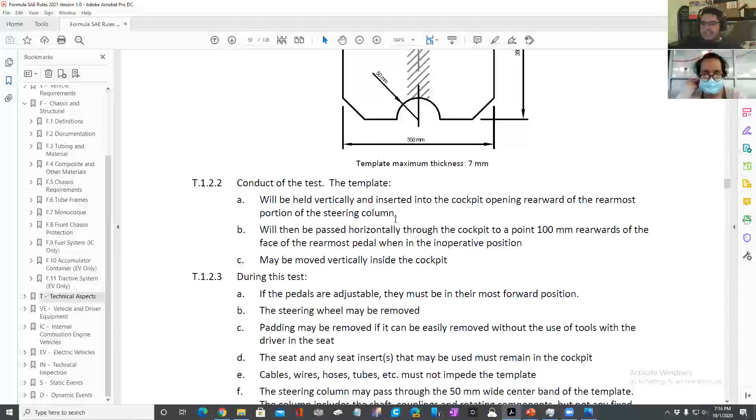Steering wheel can be removed. This needs to go through the front roll hoop, so it gets passed through here - you remove the steering wheel, pass it in, and it goes here. They flip it around basically, kind of like checking if it fits. We actually have a wood cutout of this that we use, and we design it in SolidWorks too and just pass it through to make sure it fits. This is just telling you how it gets fit in there.

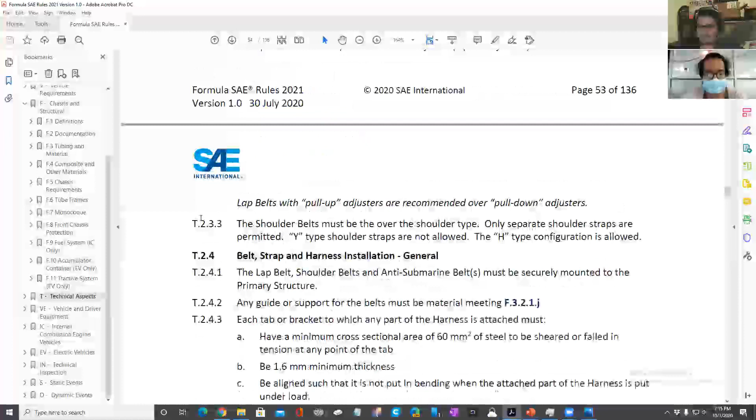Firewall - that's more ergonomics, they put a giant metal plate in there. And harness, that's ergonomics. Also ergonomics. Yeah, that's what this is. I don't think we designed this in SolidWorks - I think it just gets added after they figure out the seat placement.

So yeah, sorry for keeping you late. I think that's all I have for today. No, no, no, no worries.